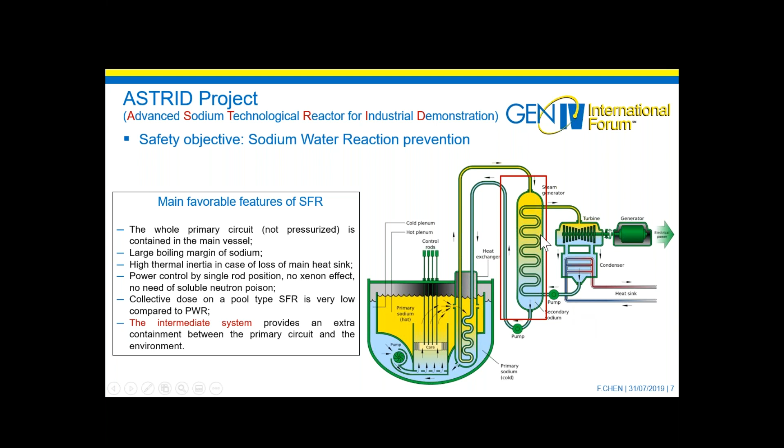And here, the feature that I want to emphasize for the present work is the intermediate system, which provides an extra containment between the primary loop and the environment. It avoids any radioactive material outflow from the primary vessel. The intermediate heat exchanger transfers the thermal power from the primary loop to the third one, which is the power conversion system, PCS.

In the frame of the PCS study for the ASTRID reactor, in order to improve the safety, especially the sodium water reaction risk, there are two systems studied in parallel. First, the classic one is the water steam PCS with steam generator. The objective of this system is to improve the robustness of the steam generator relative to the sodium water reaction, and the sodium water reaction knowledge and its modeling, etc. So the question is how to minimize the sodium water reaction risk in SFR. So this question leads to the study of another concept, the gas PCS.

In the Brayton cycle gas power conversion system, the sodium gas heat exchanger (SGHE) using inert gas replaces the steam generator, and CEA is in charge of its development. And this is also one of the main innovative options under investigation for the ASTRID project. And our present work is in the frame of the SGHE development. And this development requires different fields of studies.

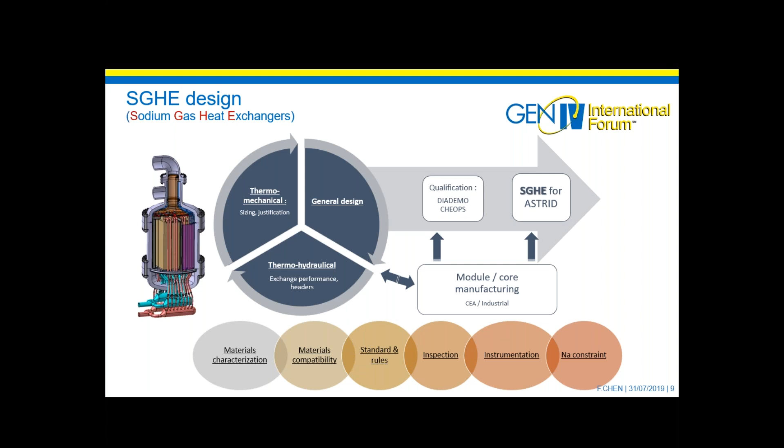So the general design of SGHE is shown on this slide. The SGHE concept is a component power unit of 180 megawatt thermal. It means two components, each secondary sodium loop. The principle of this design of SGHE is based on a component integrating 8 elementary modules of compact plate heat exchanger into a pressurized vessel, which also plays the role of inlet manifold.

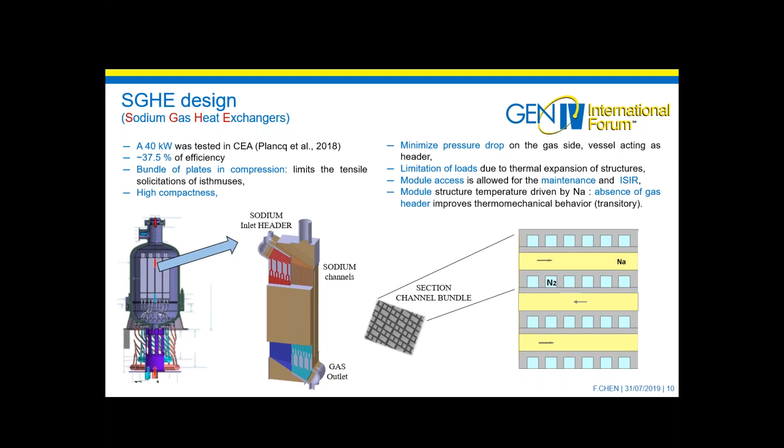And these design options aim at maximizing the compactness and minimizing the pressure drop, minimizing the sodium inventory in the components, and limiting the thermomechanical stresses, etc. And a test of 40 kilowatt SGHE was carried out in CEA, and the efficiency can reach more than 37%.

So in this design, what I want to emphasize is the nitrogen is chosen for the tertiary loop, and the pressure of the nitrogen is 180 bar, while the liquid sodium is 5 bar. So in an accident scenario where the heat exchanger wall cracked, this huge pressure difference across the wall could lead to a gas leak submerged into liquid sodium.

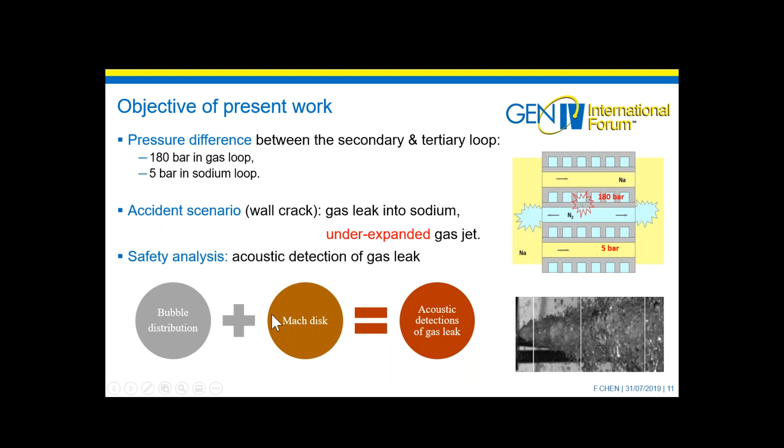And according to the previous studies in CEA, the gas leakage can be classified into several types by the crack size. One is a supersonic jet, noted underexpanded gas jet. This is the one which covers all physical phenomena of different gas leaks. So particularly in safety analysis, the structure of the underexpanded gas jet enables developing acoustic methods for detecting these gas leaks, for example, based on the bubble distributions and Mach disk.

So what's the Mach disk? Okay, as we can see, this is the picture of the general structure of an underexpanded gas jet submerged into a liquid. And as we can see here, this is the Mach disk, which separates the flow into regions: a supersonic region, upstream of the jet, and a subsonic region, downstream of the jet.

Okay, let's come back to the safety analysis. The acoustic methods require dedicated knowledge of jet structure. So in order to achieve this study of different physical phenomena, the CEA carried out a number of collaborations with other research institutes and centers.

For example, on the viscous effect inside the nozzle flow, we have collaborated with the IMFT in Toulouse, France. For the study of compressible flow, particularly for the barrel shock and Mach disk, we worked with IMFT, IUSTI in Marseille, France, and ANL in the USA. And for the acoustic detection of leak noise, we have collaborated with KTH. On liquid droplet behaviors in supersonic flow, we have worked with IUSTI. They did experiments for the CEA.

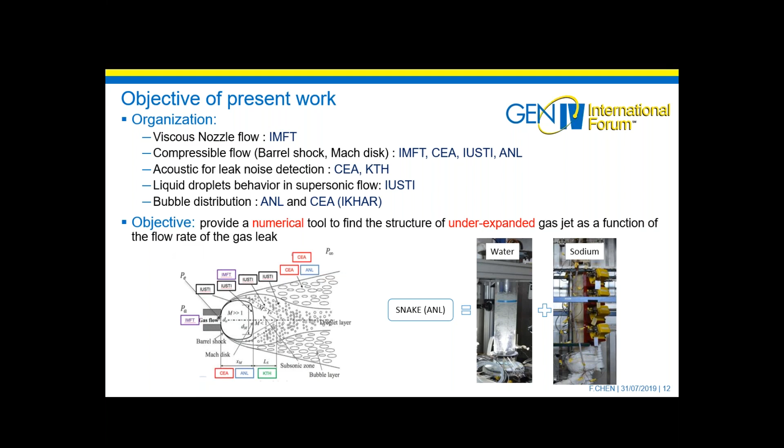And concerning the bubble distribution study, the experiments of nitrogen gas injected into water and liquid sodium were carried out on a SNAKE facility at ANL. As we can see, this is the photo of the SNAKE facility at ANL. So, in the frame of this work organization, the objective of the present work is to provide a numerical tool to estimate the structure of the underexpanded gas jet as a function of the flow rate of the gas leak.

Okay, next I'd like to talk about the development of the present work in detail, starting with the development process. First, we started the development process with the identification of the physical phenomena, and it allows developing a mathematical model to describe these physical phenomena. And then we implemented this model into a numerical tool and carried out several validation tests to verify our mathematical model.

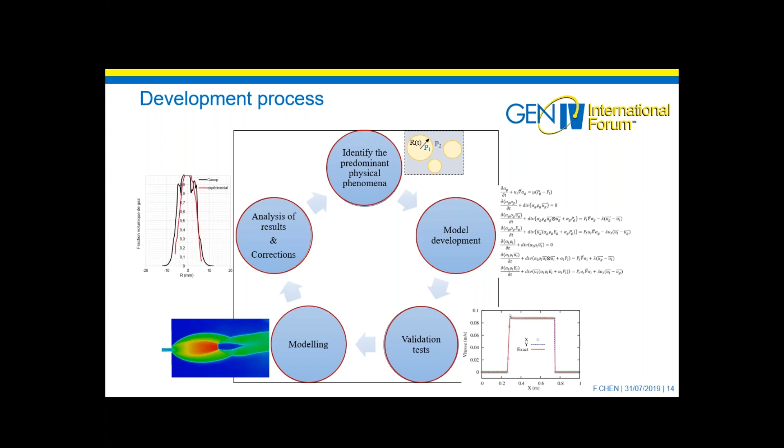Once the model and numerical schemes are validated, we applied the code to the underexpanded gas jet modeling and compared the results with the reference cases. And this process checked the agreement between the developed model and the identified physical phenomena. So some improvements could be made accordingly.

So concerning the identification of main physical phenomena, the velocity inhomogeneity between two phases is studied first. Okay, first, Le Romancer carried out experiments of nitrogen injected into water with a stagnation pressure of 20 bar and a nozzle diameter of 0.7 millimeter. And the results showed that the velocity difference between two phases could reach several hundred meters per second.

And besides, a previous PhD work of Vivaldi in CEA carried out a numerical study of gas injection into liquid sodium with a stagnation pressure of 7 bar. And it shows a similar velocity difference as well. So this velocity inhomogeneity should not be ignored in our case. So our model needs to consider the velocity of each phase and the momentum exchange between both of them, integrating the drag force between continuous phases and dispersed phases.

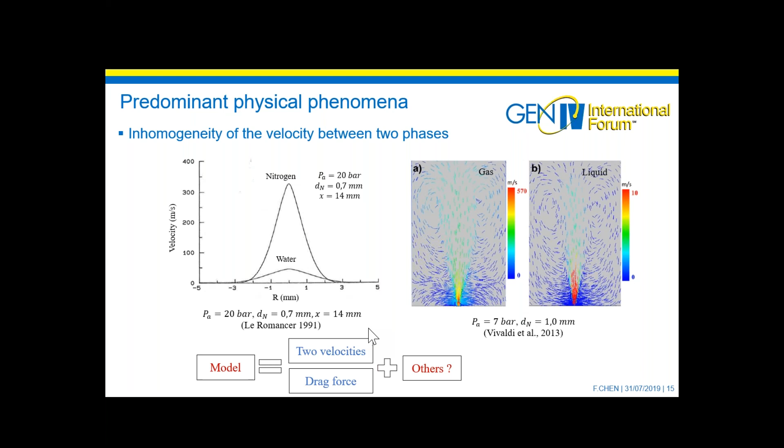So besides, in an underexpanded gas jet submerged into a liquid, as we talked previously, there are dispersed phase regions, bubbles, droplets, and their transition. The evolution of bubble size depends on the pressure difference between the inside and outside of the particle. So as one objective of the present work is to track the evolution of dispersed phases and bubble size, the model needs to take into account the pressure inhomogeneity as well.

Okay, as to viscosity, we did a numerical study of a monophasic underexpanded gas jet in an SGHE channel, and this work was published last year. It's shown that the viscous effect inside the nozzle influences the structure of downstream shocks. For example, the curvature of the incident shock waves, particularly Taylor-Görtler vortices due to the competition between the centrifugal effect and the viscous effects in the boundary layer, are observed.

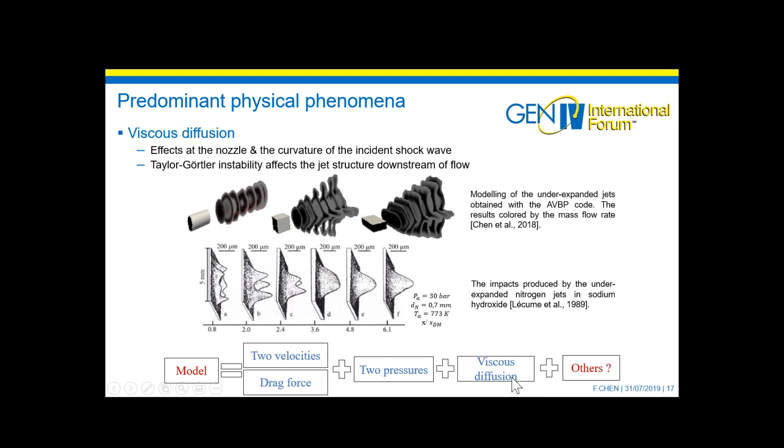Except for these three predominant physical phenomena, we have checked that there is no chemical reaction according to the experiments carried out at ANL. And besides, there is no phase change in an underexpanded nitrogen jet into liquid sodium. In this picture, we interpolated the state points into the phase diagrams of nitrogen, sodium, and water. They are respectively in purple, blue, and orange.

These state points are obtained from the numerical study of the monophasic jet in an SGHE channel. And from this, we can conclude that under the SGHE operating conditions, there is no phase change of nitrogen and sodium. Meanwhile, for nitrogen into water, there could be a phase change of water.

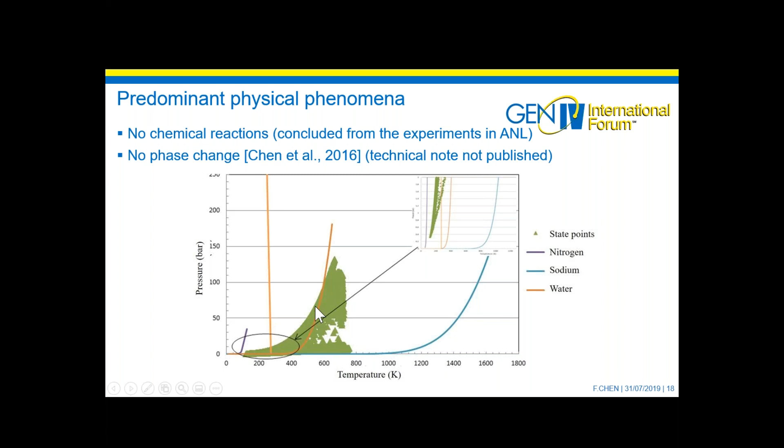So according to the previous study of physical phenomena in a nitrogen jet submerged into sodium, we developed our mathematical model from the Baer-Nunziato model, which enables us to model two velocities and two pressures. The system includes momentum exchange by integrating the drag force between the two phases and the viscous effects in the pure phase. Numerically, the Riemann problem for biphasic flow is solved by the Rusanov solver, and the model is integrated into a MUSCL-Hancock scheme. And now the question is, are there any other terms that we need to consider?

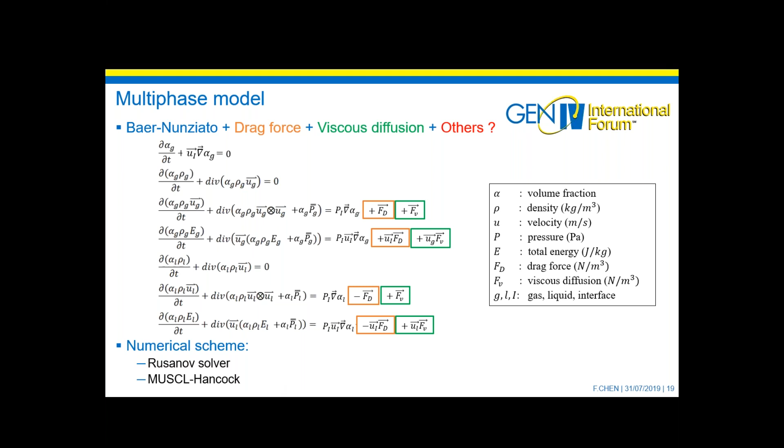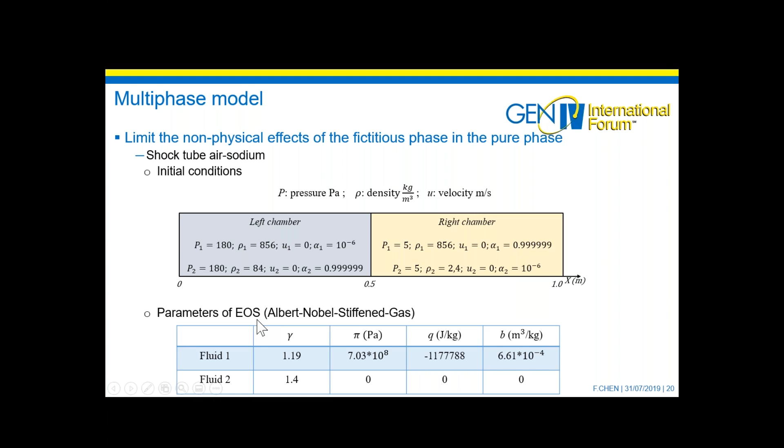So first, I want to show you a very interesting biphasic shock tube test. As we can see in this picture, in the shock tube, the left chamber is filled by gas with a pressure of 180 bar, and the right side is filled by liquid sodium with a pressure of 5 bar. This is the same as the SGHE operating condition. And the equation of state is Noble-Abel stiffened gas for both of them.

Okay, first let's see the results. This is the velocity profile. On the right side of the shock tube, where the gas is absent, the velocity of the gas, noted fluid 2, reaches about 1,000 meters per second. The same result is observed in the pressure profile. For example, on the left side of the shock tube, where the liquid phase, noted fluid 1, is absent, there is a huge non-physical change of pressure. This observation makes no sense in physics. Therefore, we need to add something to correct these non-physical effects of the fictitious phases in the pure phase.

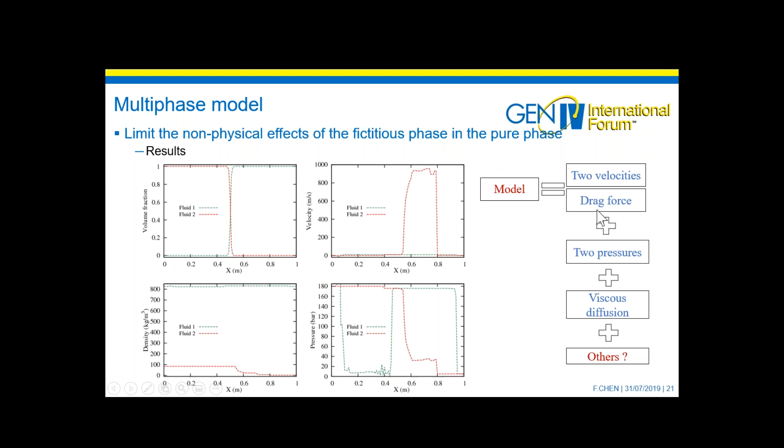In the pure phase, the solution that we found is adding velocity and pressure relaxations into the model. And this is the result obtained with the model with velocity and pressure relaxations. We can see that the non-physical effect is corrected.

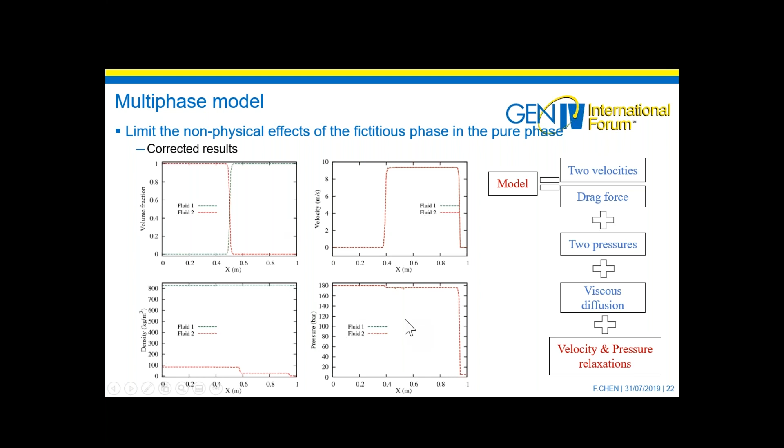So for the next step, numerically, for underexpanded gas jet modeling, in the dispersed phase and shockwave regions, we need the mesh well refined. In the other regions, we don't need the mesh refined like this. So a numerical tool which enables adaptive mesh refinement fits our need. So we integrated our model into a numerical tool named CANOP. There are two layers in CANOP. The low-level layer enables cell-based adaptive mesh refinement and parallel computation by integrating the p4est library.

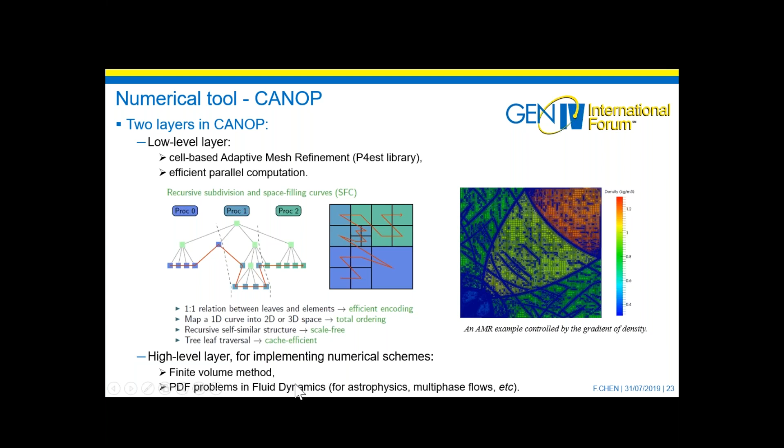And as we can see, this is an example of AMR generated by the present code, and it's controlled by the density gradient. It means that the mesh is well refined where the density gradient is very strong. And in the high level layer, it enables us to implement the numerical schemes with the finite volume method, particularly for solving problems in the fluid dynamics field.

So in more detail, the common functions in CANOP are in charge of the time iteration, mesh adaptation, parallel management, connectivities, etc. Based on these common functions, we can develop branches for each problem by defining the user data, numerical schemes, boundary conditions, initial conditions, etc.

And the present work develops a new branch to solve the problem of compressible multiphase flow, particularly for the application of underexpanded gas jet into a containment channel named superbifluids. And then we can send our tests to the IDRIS machine. This is an institute for development and resources in intensive scientific computing, which enables us to launch intensive computing.

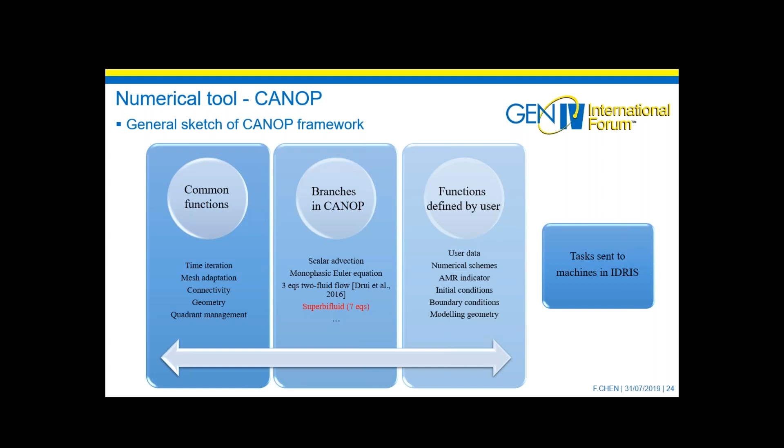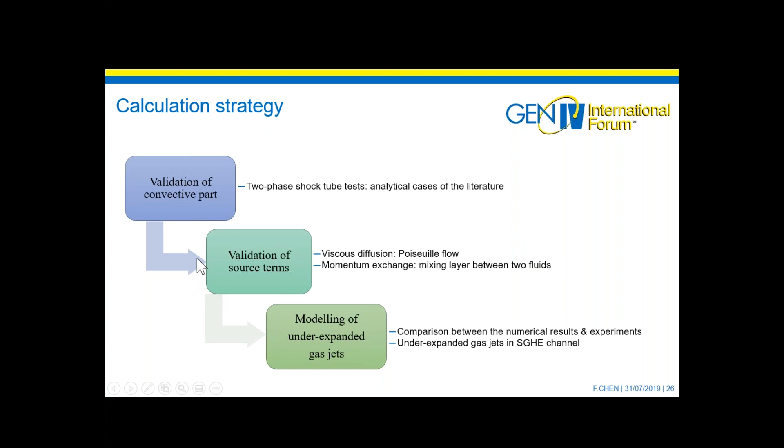So now let's move on and discuss results, including model validation and its application to modeling of underexpanded gas jets. There are 3 steps in the calculation strategy. First, we focus on the validation of the convective part by the two-phase shock tube test. And then validation concerns the source terms, including viscous diffusion in pure phase and the momentum exchange between the continuous phases and the dispersed phases. Once the validation is finished, we applied the model to carry out the modeling of underexpanded gas jets.

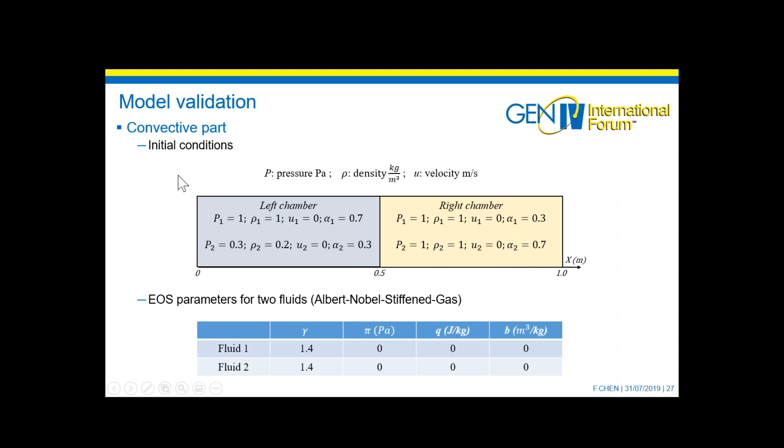So at the point of convective part validation, I'd like to show you an example of a multiphase flow shock tube test. The initial conditions for fluid 1 are identical for 2 chambers, except the volume fraction. In the left chamber it is 0.7. In the right chamber it is 0.3. For fluid 2, the high pressure is located in the right chamber. It means that the shock waves will propagate from the right side to the left side.

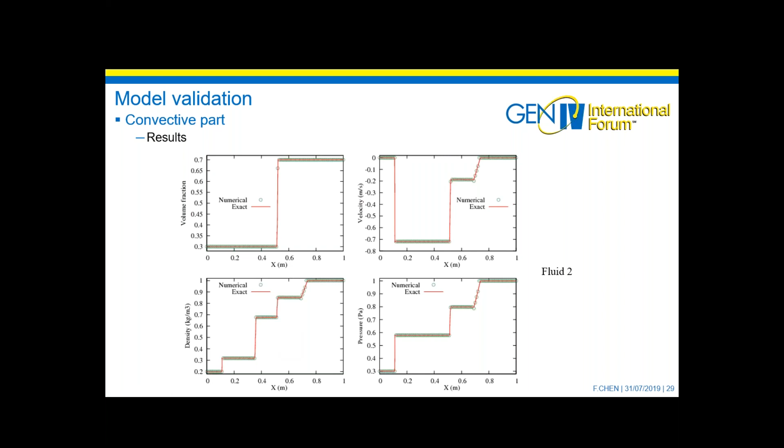And for fluid 2, the shock waves propagate towards the left side, and we can see the contact surface and volume fraction contact surface are well reproduced compared with the exact solution. So in conclusion for this part, according to a number of validation tests, we can conclude that the convective part is validated.

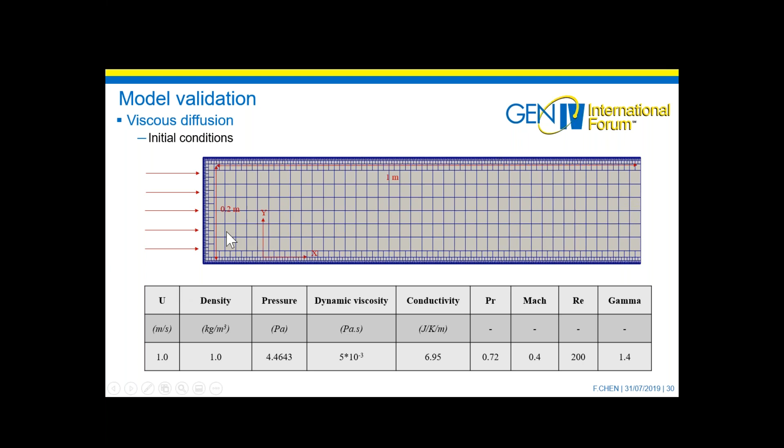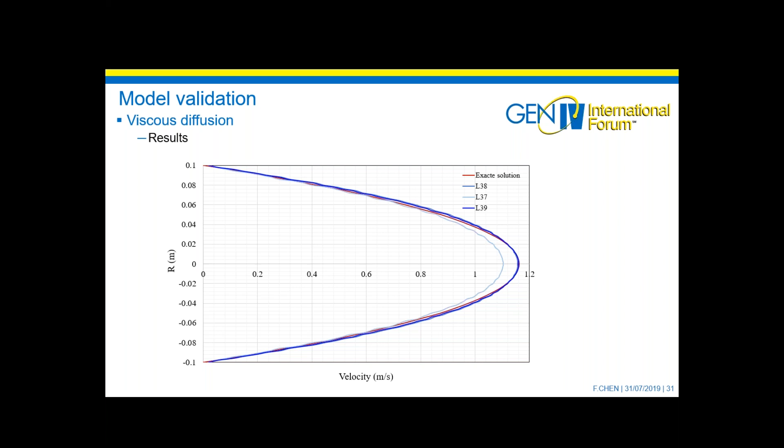For the viscous effect validation, we did a classical test, Poiseuille flow. The gas flow enters from the left inlet into a channel of 0.2 meter. And here are the numerical results compared with the exact solution. I want to explain here the key notation L, for example, L38 means that the minimum and maximum levels of AMR are 3 and 8 respectively. And we can see as well the numerical results agree well with the exact solution. It allows us to check the integration of the viscous effect.

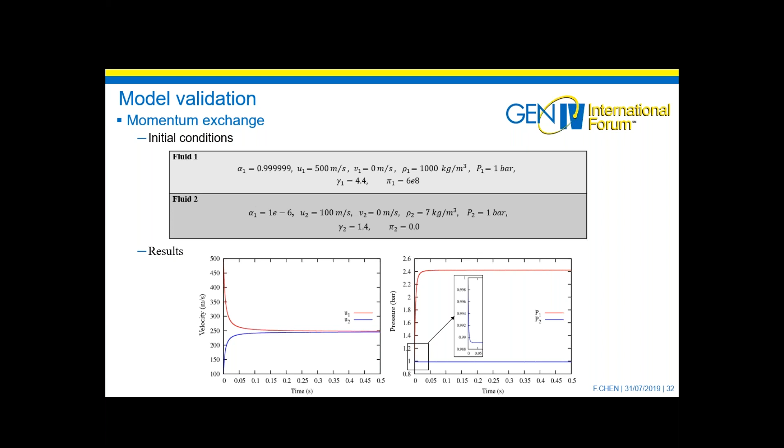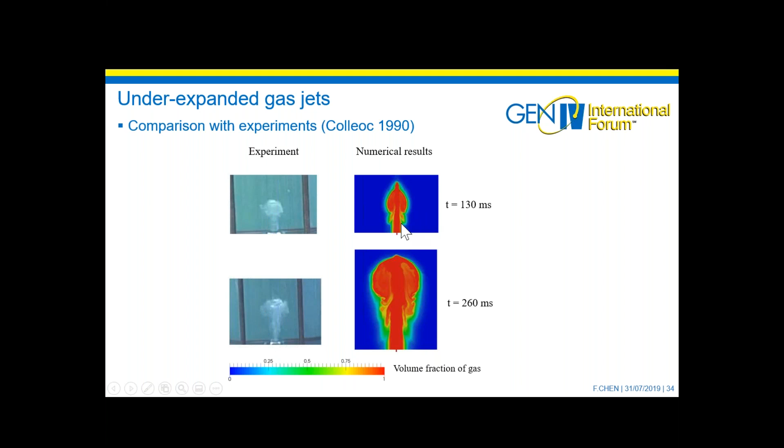Let's compare the results in more depth. First, I want to present the main characteristic in an underexpanded gas jet, the Mach disk.

In the biphasic jet, several shock cells are produced instead of only one shock cell in monophasic jets. One reason is because the gas with very high velocity is injected into liquid, which is at rest. It causes the entrainment of liquid by gas, and this part of liquid doesn't participate in the formation of the Mach disk, which is why the Mach disk of the biphasic case is separated into several cells.

In addition, we compare the volume fraction results with experiments. We can see there is a difference between both of them in the bubble region. Here it means the volume fraction is close to 1, because this is the free gas jet.

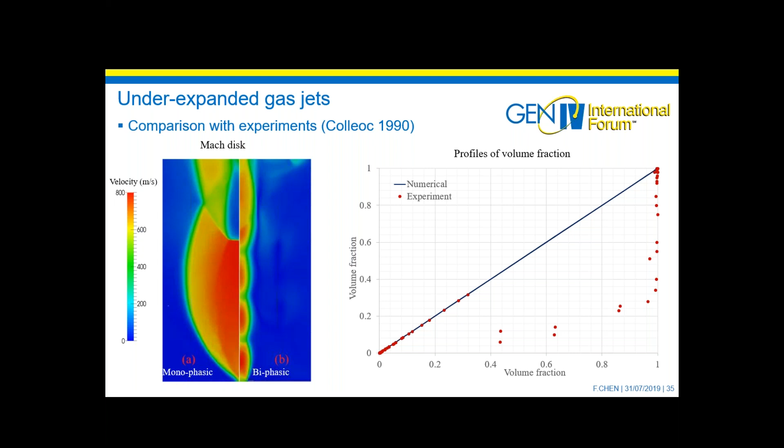Nevertheless, despite this difference, this test shows the capability of the code to reproduce the main structure of a biphasic underexpanded gas jet. It allows us to apply the code to model the gas leak in an SGHE channel.

In this study, some hypotheses are considered. First, the size of each dispersed phase is supposed to be uniform. Second, the fragmentation of dispersed phases owing to shock waves and their reflected waves is ignored. Third, the interface properties are considered homogeneous in the whole region.

I will explain more at this point. In the present work, there are terms relevant to the velocity and pressure of the dispersed phase at interfaces. However, in our case, there are two types of dispersed phases: bubbles and droplets. The interface properties actually depend on the type of dispersed phase, but in the present work, we suppose that the interface properties are identical in the whole region.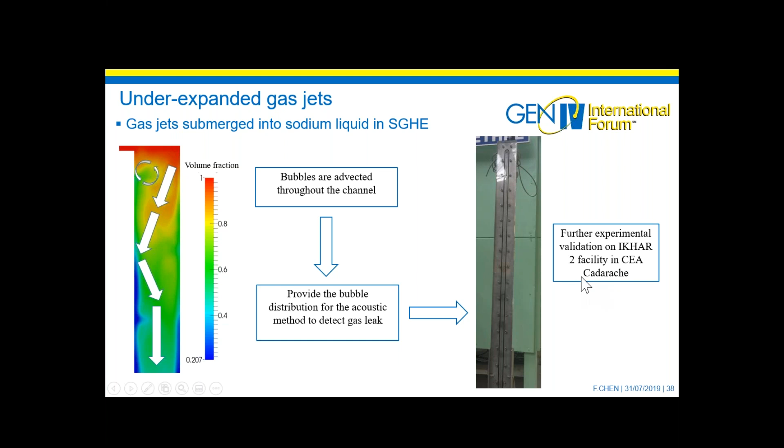Finally, let's review some key points from the present work. As a conclusion, first, a biphasic flow model integrating the main physical phenomena of an underexpanded gas jet is developed.

Our model enables modeling of each velocity and pressure for each phase, modeling of the momentum exchange between two phases and viscous effect in the pure phase. We also add velocity and pressure corrections of the fictitious phase.

Second, the model is implemented into a numerical tool, CANOP, and its capability to reproduce different two-phase flow configurations is validated. The results of modeling an underexpanded gas jet in an SGHE channel are promising.

So the achievement of this work enables us to schedule future work. From a perspective standpoint, first, in order to improve our mathematical or numerical model, we can take into account the interface property as a function of different dispersed phases, droplets and bubbles.